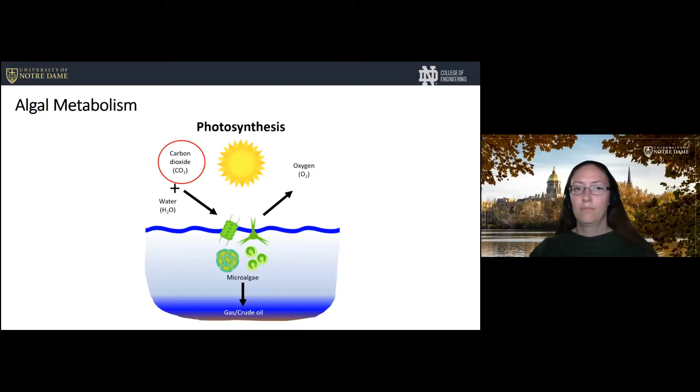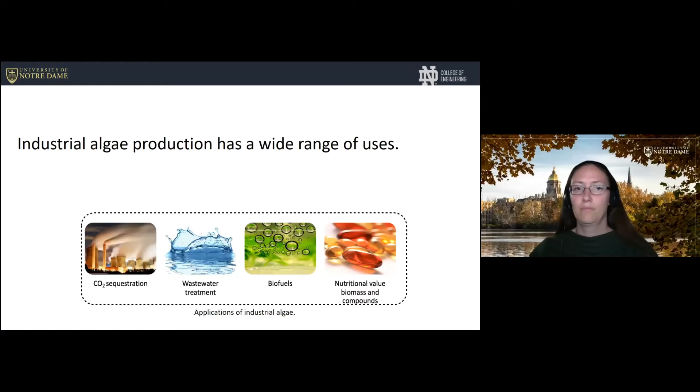So there are a number of ways that people can use algae. They can use it for carbon sequestration, wastewater treatment, biofuel production, and even producing chemicals of value, pharmaceuticals, pigments, and so on. But if you hit the next button, I'm going to focus here on the idea of using them for biofuels. So next, please.

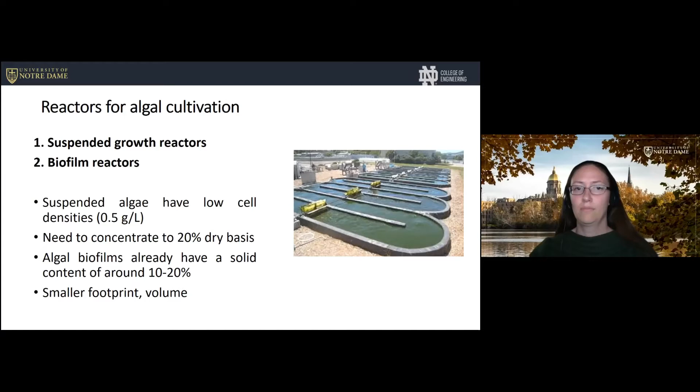So an advantage of the biofilms is that they form these dense aggregates of algae that are already at a high density, similar to the density that you'd get after the concentration of the suspended algae. So it can save a lot of energy in that respect. It also is more compact, has a smaller footprint and lower volume. So there are several advantages to using the biofilm reactors.

Next, please. As just an example of one, it's just a big rotating drum with, in this case, cords on it, and the algae grow on the cords. And they can be harvested just by scraping it off.

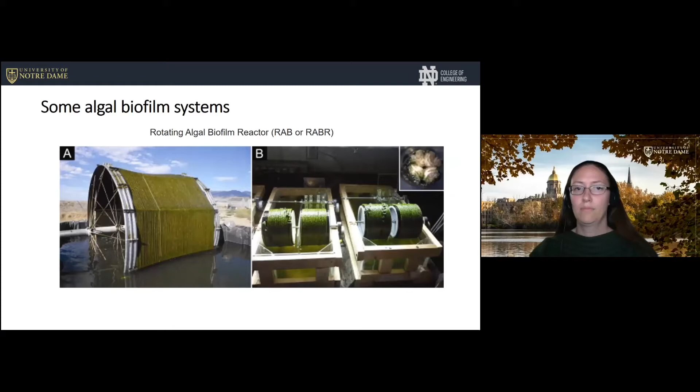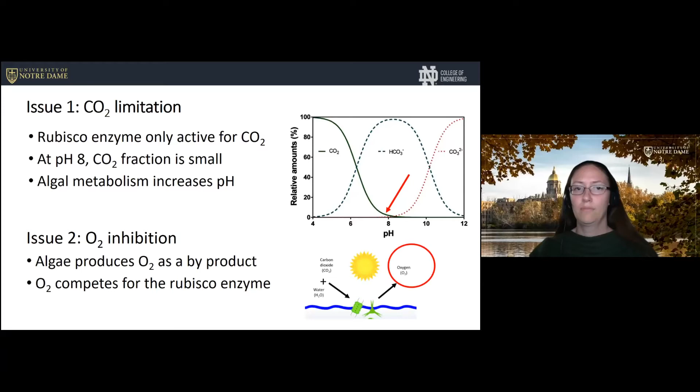Another issue is the oxygen inhibition. As you saw previously, next, the algae produce oxygen as a byproduct, and it can inhibit the CO2 sequestration because it competes with the same enzyme. So I get a next for another transition there. Competes with the Rubisco enzyme. Next again. And again, you can see that they form oxygen as they metabolize. If we have a biofilm and have all these algae next to each other, it's like having a data center with all the processors stuck next to each other producing a lot of heat. That heat accumulates and doesn't dissipate. The oxygen accumulates in the biofilm, doesn't dissipate, and can cause inhibition.

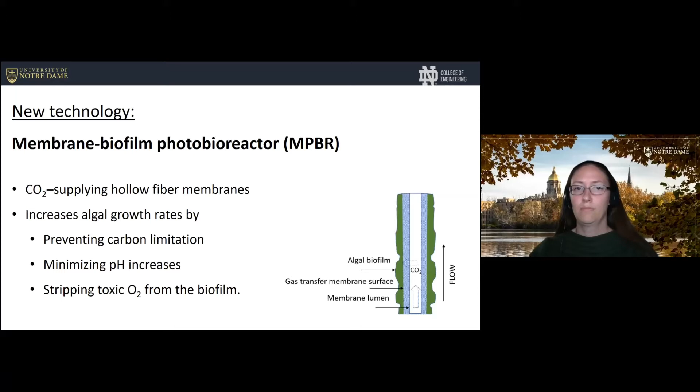Next, please. What we propose doing is using a new support for growing algae, and we call this a membrane-biofilm photobioreactor. In this case, instead of relying on CO2 diffusing from the liquid into the biofilm, we supply it through a hollow fiber membrane that we pressurize with CO2. Now, this CO2 can be taken from a stack or from a treatment plant, from some waste source, and be delivered directly into the algal biofilm. I think if you hit next, yeah, so there's our CO2.

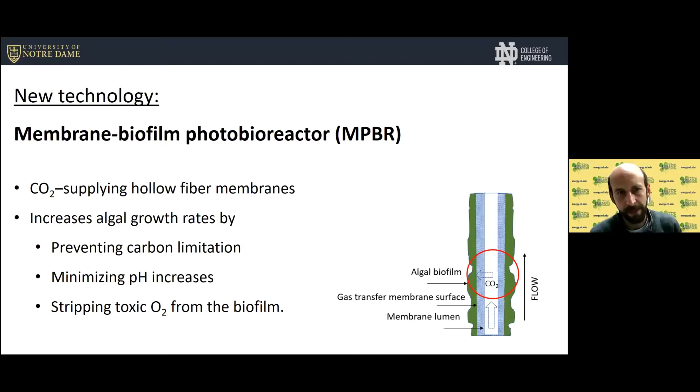And the advantage is we have much higher CO2 concentrations, allowing the algae to grow more quickly. The CO2 buffers and actually drops the pH within the biofilm, preventing this shift to higher pHs, which limits their activity. And also, in the same way that CO2 diffuses from the membrane into the biofilm, oxygen can be stripped out of the biofilm back into the membrane. So we can avoid this oxygen inhibition.

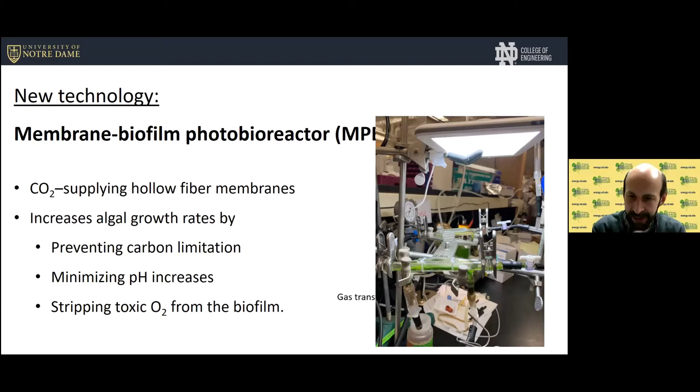Next, please. Here's a picture of this membrane biofilm photobioreactor in the lab. It's pretty small. This one's like 3 or 4 inches long. If you click again, Jen, you'll see another view of it. And you can actually see the hollow fiber membranes covered with green algae in the interior, kind of going left to right inside that flow cell.

Yeah, next again, please. So we've done some experiments and done some modeling, and our modeling shows that, in fact, we get a significant increase in the growth rates of these algal biofilms when we supply the CO2 from this membrane. So the plot on the right, and I think if you click next, there'll be an arrow that shows up there. That's what we get in the algal biofilm thickness over time when we supply the CO2, as opposed to that blue line on the bottom when we don't supply the CO2 from the membrane. Next.

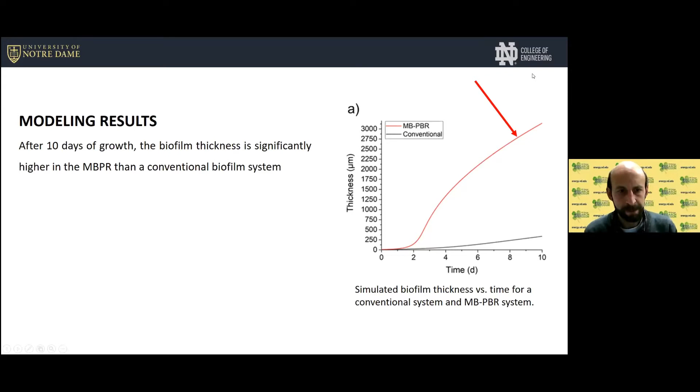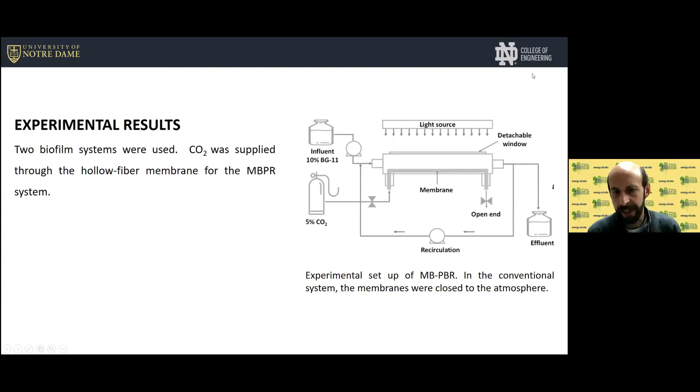And we also did experiments. Here's a picture of the reactor on the right. We have a light source on the top. We have a flow cell with the membranes, and the algae grow in this flow cell. Next, please.

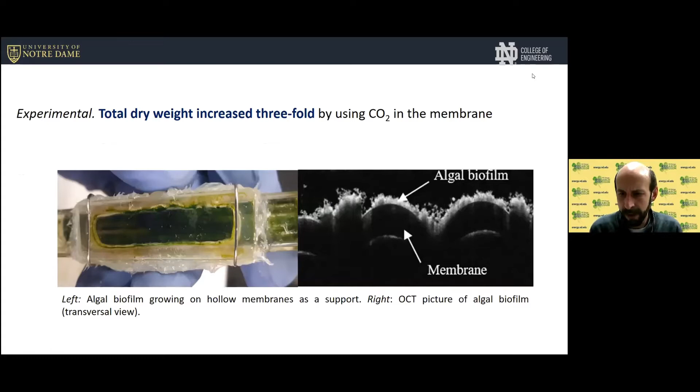And again, here's some pictures. We have the algal biofilm growing on the membranes on the left, and on the right we have an optical coherence tomography image where we can kind of get a CAT scan. We can see the membranes on the bottom and the algal biofilm growing on the top. Next, please.

So, in conclusion, we think that this membrane photobioreactor can enhance the rate of algal biomass production. And the advantages are it avoids CO2 limitation and minimizes oxygen inhibition, leading to higher growth rates. And because it supplies CO2 directly to the biofilm, as opposed to trying to bubble and transfer it into the bulk liquid, which would be very inefficient and also lead to loss of CO2, this utilizes it extremely efficiently. It's going exactly where it's needed and it's consumed in the biofilm.

One more transition. What we'd like to do next is take the next step and see, now that we have the reactor and shown that it grows more quickly, how can we use this for actually looking at biofuel production, for example, producing lipids that then can be extracted and converted into biofuels. So that's kind of the next step that's waiting to happen.

So I guess with that, I am done and happy to take any questions. Fantastic. Do we have any questions right on hand right now? Can I ask one?

Absolutely. Wondered, do you know anything about the photo efficiency, Rob? What fraction of photons coming in are actually getting used? So, that's a good question. No, we haven't evaluated that. I'm trying to think if it would be different from a regular algal process. I suppose it depends a little bit on how it's operated, but I don't see why it would be different from any other algal process in that respect.

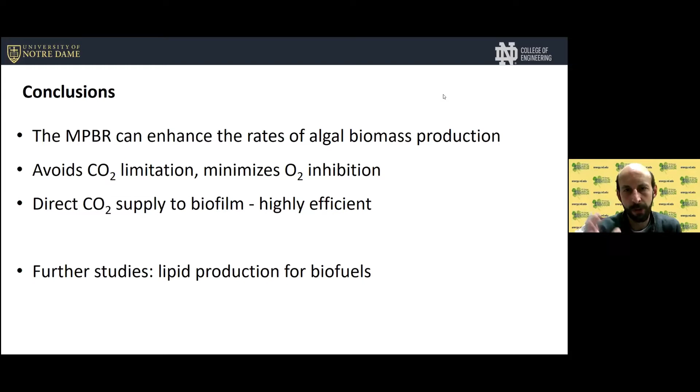Yeah, that's a really interesting question. I think that leads to an important question, which is how do you harvest the biofilm when it's ready? And the answer is, I guess we don't know exactly. One thing that I've seen done in conventional biofilm processes grown in tubes, tubular photoreactors, is they pass, I think they call it a pig, like a block through it, and that scrapes the biomass off the walls.

I don't know if you were to grow it vertically, if the weight and the strength of the biofilm would be such that it would really fall off when it reached the right thickness. Actually, with our modeling, we've been trying to estimate the optimal thickness at which we'd like to harvest it. Because if you harvest it when it's very thin, then you're harvesting frequently. If you wait till it's too thick, then the interior portion probably isn't active because the light doesn't penetrate far enough. So there's some kind of optimal thickness where you'd like to harvest.

There's also probably a residual thickness that you'd like to leave, because you need algal biofilm to produce more algal biofilm. So these are all good questions, and I don't have a good answer, but I think they're very interesting and important ones that we'll need to look into eventually.

I had a question. Sure. You mentioned that you were looking down the road at using these maybe with effluent from traditional combustion, right, or CO2. How robust are the membranes in the algae to the other byproducts that you would get off of that combustion, like carbon monoxide, NOx, SOx, those types of things?

Those are all good questions. So yes, I don't know for sure that we could use the combustion right off of the stack without any prior treatment. There's also biogases produced at anaerobic digesters and wastewater treatment plants that also have sulfide or siloxanes or other things that could be detrimental. We haven't gotten that far yet, but I think pretreatment would be needed, but we don't know for sure at this point.

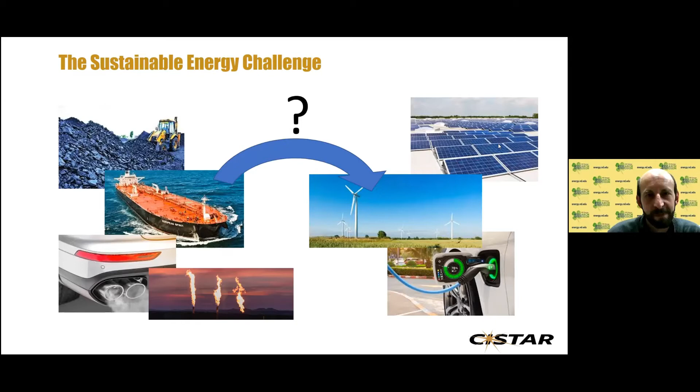Things like hydro and nuclear and others are important, but the energy need is so great that we're not going to satisfy it all immediately. And again, then the challenge is how to continue to provide ourselves power, but do it in a more environmentally friendly and sustainable way.

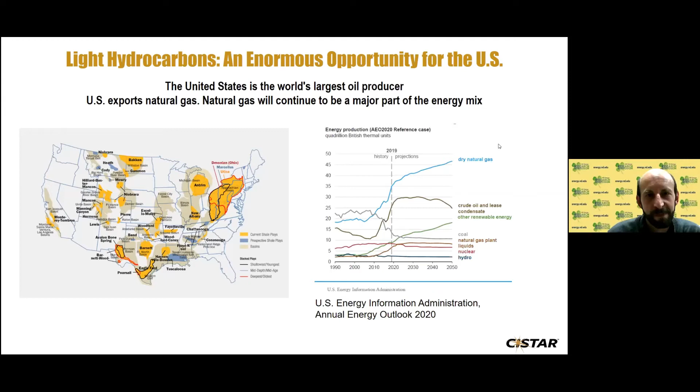So over the last 15 years or so, the United States has been presented with a new opportunity. There have been technologies that have allowed us to access hydrocarbons that aren't available in other parts of the world, but are available right here in the United States in the form of shale gas. And I know you've maybe heard a lot about fracking and shale and so forth, and certainly extracting energy from the earth always has to be done in an environmentally responsible way. But I think it's safe to say that we're not going to stop doing that altogether anytime immediately.

So the point of CISTAR is to take advantage of these newly found shale resources and use them in a way that helps us manage this transition to the new energy future. So you could go to the next one, Jen.

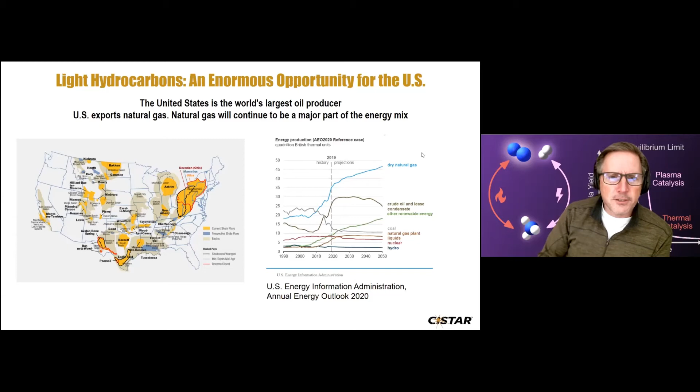So what is the challenge with shale gas, short of getting the gas out of the ground? Well, the real scientific challenge, and the one we're trying to address, is that the types of feedstocks that you get out of shale are very different from coal or petroleum or what have you. Shale gas contains a lot of small molecules. People remember from their organic chemistry from long ago, there's a picture of a methane molecule, an ethane molecule, a propane molecule. These are small, they're gaseous at ambient conditions.

They're not a solid like coal or a liquid like petroleum. Unlike oil fields, which might be in one location and drawn on for a long period of time, the sources of shale gas are remote, as I just showed you. They're scattered all over the United States, even here, even in Indiana, and so that raises a challenge in how to take advantage of something that's distributed so far and wide.

That's in large part why you'll see things like flaring happening, which is a real waste of energy. In some of these places where hydrocarbons are being taken out of the ground, some of these small molecules are being released, and there's nothing to do with them other than to set them on fire. And so that's a serious waste. And why is that so? It's because these are intrinsically unreactive. So they're gaseous, they're hard to move anywhere, and they're unreactive, so they're hard to do anything with.

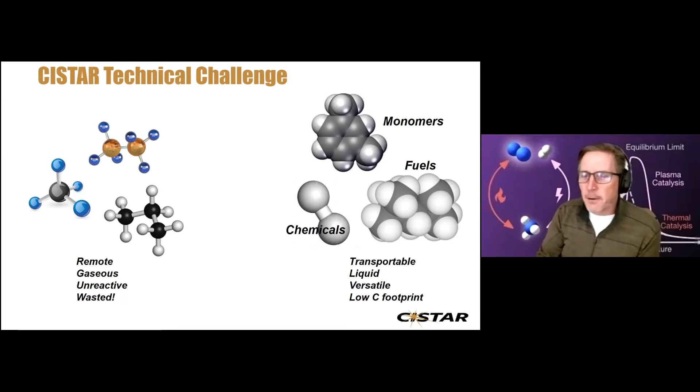And the advantages of those things on the right is those are condensable materials. That means they're easily transportable. They're much more versatile from a chemical perspective than the things on the left. And if we manage this process in the right way, we get to those useful endpoints in a more sustainable, lower carbon footprint way than we do, say, with getting petroleum from the Middle East. Could you click next?

So the vision of CISTAR is to develop the processes that are necessary to take what's widely available and often wasted and transform it into things that can be used in a much more useful way, and to do that in a sustainable way and in a way that has a net carbon footprint lower than what we do today. Oops, can you go back for a second?

I didn't put in a technical slide as to what actually makes it hard to go from the left to the right. It looks like I'm just moving carbon atoms around. How hard can that be? Well, it turns out it can be pretty challenging to actually do the types of selective reactions that need to happen. So a big part of CISTAR is chemical transformations.

A big part of CISTAR is separations, process optimization, and then it's environmental evaluation to give us feedback on which of our processes are really going to be effective and both economical and environmentally responsible. So those are big challenges. They're not the sorts of things I'm going to solve myself or any one individual is going to solve themselves. So now if you could go to the next.

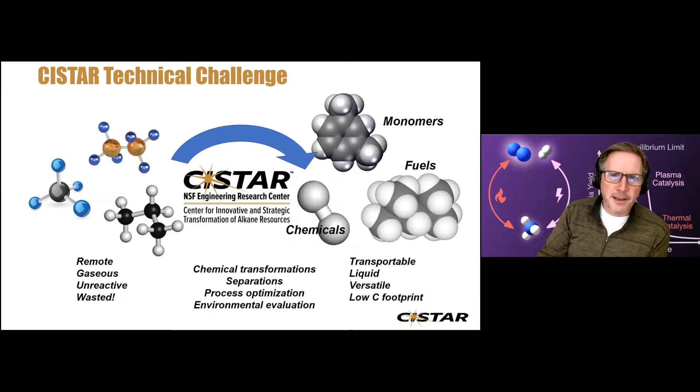So CISTAR is a National Science Foundation Engineering Research Center. So this is the biggest type of activity that the National Science Foundation funds. It's a multi-institutional team. It's led from Purdue, but with a very large contribution from Notre Dame and our other partners at New Mexico, Northwestern, UT Austin.

There's probably about 25 to 30 PIs, and in total 200 team members if you count all the students that are working in it and other support and other things that the center does. So it's quite a large concerted effort to try to figure out how to go from the left to the right in a responsible way, left to the right on the previous slide. Can you go to the next slide, which I think might be the last?

So, part of CISTAR is to do research to enable these transformations, but it's a National Science Foundation funded center, and we recognize that to get to a productive future means more than just doing research in the laboratory. There's a large innovation component where we think about how we take what we learn in the laboratory and translate it into practice. So we have industry participants that help us with this.

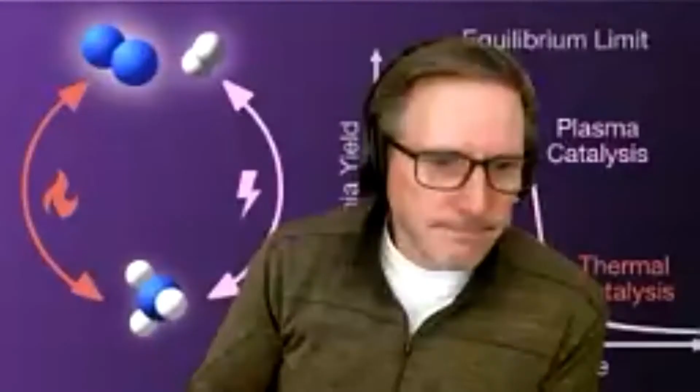All right, so in the interest of time, we're going to move on to the final presentation. Next we have Professor Zhang in the Department of Aerospace and Mechanical Engineering, who will be speaking today about thermoelectric devices for harvesting waste heat. And you can go ahead and unmute yourself. Okay, yeah. Thank you, Jen. Hello, everyone. Today it's my pleasure to talk about our work in harvesting waste heat.

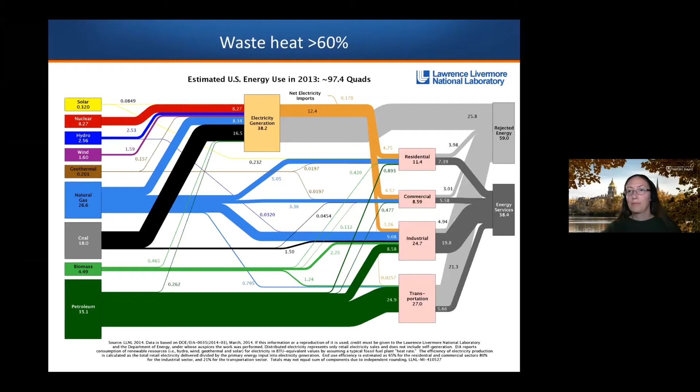So here I want to first cover, okay, sorry. One slide shows you the waste heat actually is a big deal, as Paul mentioned in the very beginning. Overall, we are wasting over 60% of the global energy consumption into waste heat. And therefore, if we can harvest even a small portion of that, it can make a huge impact.

So here, our lab is trying to harvest the waste heat using this TE device. Basically, it's a solid state device that can convert heat into power. And I'm showing you, we can basically harvest the waste heat from almost every resource, such as the waste heat in the car, in the power plant, in the factory, in the airplane, and solar thermal heat.

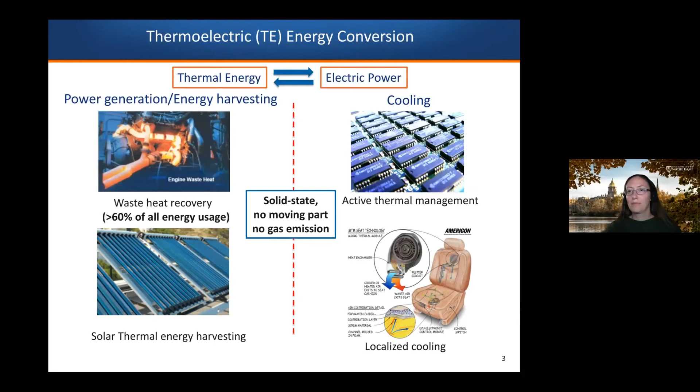We can also even use our device for cooling. Basically, here we need to use the power, then we can cool these devices. So here's just some principle showing you that we're using this very simple device, physics converting delta T into Seebeck voltage. And we need to basically get the material with very high ZT value in order to convert more heat into power, getting higher efficiency.

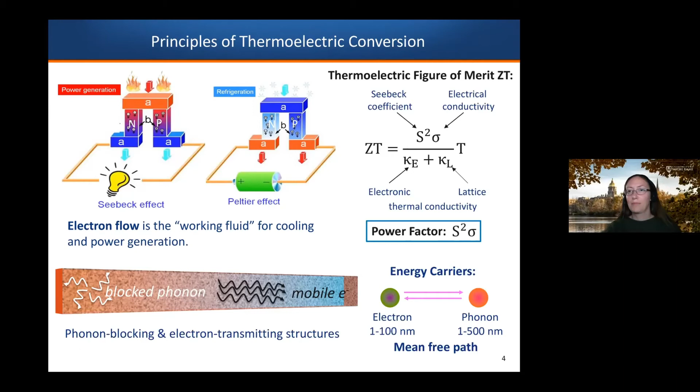So here basically we need to design the material in a way to block the heat transport, whereas allow the electrons to flow freely. Because these electron and phonon, they have very small mean-free paths, and therefore our approach is to design the material at the nanoscale in order to control the electron and phonon transport to get the highest performance at the materials level. And here's our approach from bottom up. We can design material to give us the highest ZT, converting more heat into power.

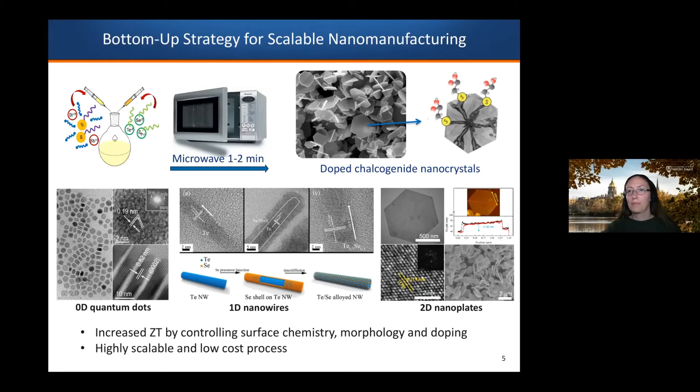So meanwhile, we also need to develop approach to transform this nanoscale material into the macro scale system to make them useful at a low cost. So here our approach is to use a very scalable, low cost printing process. We can then assemble and convert this nanoscale building block into low cost, high performance system to convert the waste heat into useful power.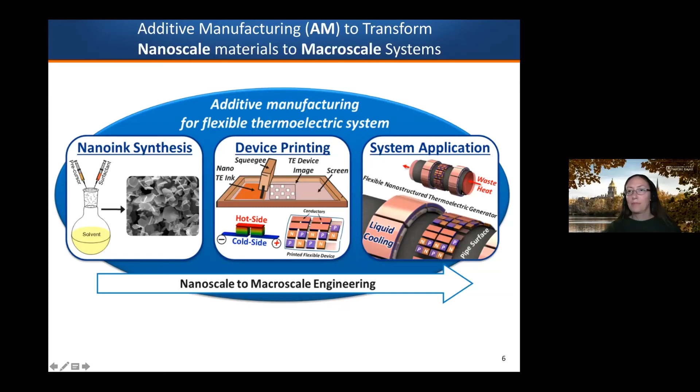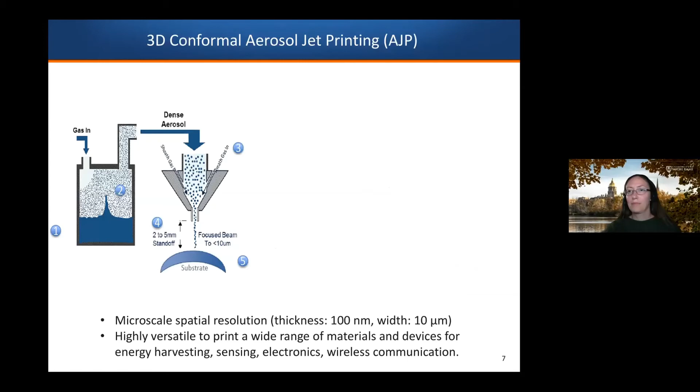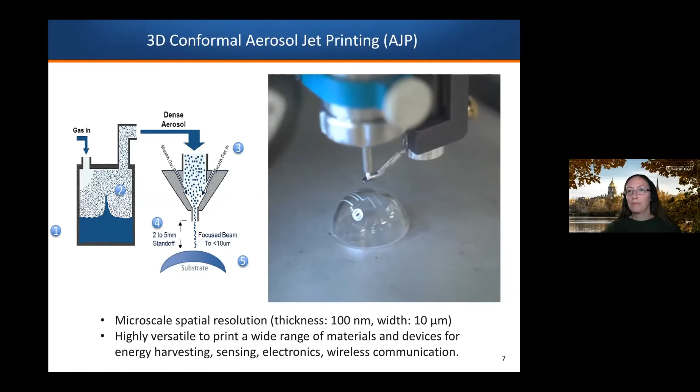So we have many different printing methods we have developed in the past. One of the printing methods we're using is this aerosol jet printing. We can basically print the device on any substrate, either 2D flat or 3D curved substrate. So after printing, we also have a very fast and efficient technique to sinter the printed particle into a highly dense and high performance flexible device. So here we use this pulsed light to sinter the printed particle on virtually any substrate, like this flexible substrate polyimide papers, which can enable us to develop highly flexible device.

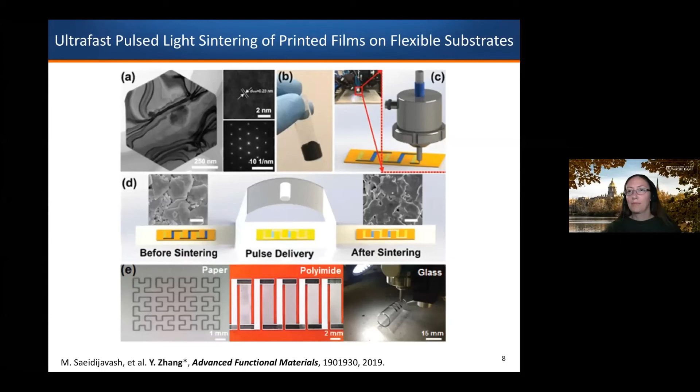Besides developing this small-scale device for powering sensors, we're also working on some much bigger scale device in harvesting the waste heat from the cars, from power plants, and so on. This is one previous DOE project we worked on. The goal is to recover this automotive waste heat from the exhaust, because you all know the car is wasting over 60% of the fuel energy into the waste heat. So our goal is to improve the fuel economy in the car and also reduce the CO2 emission.

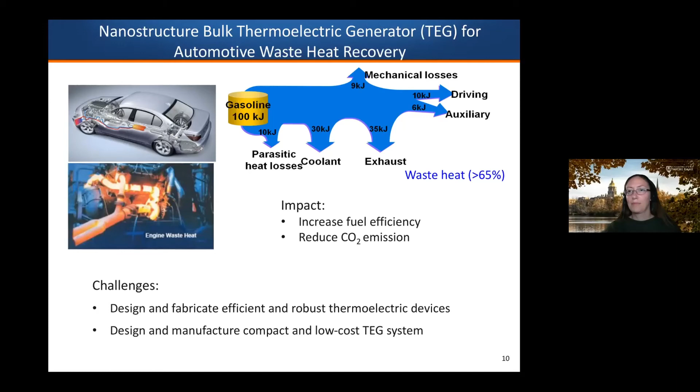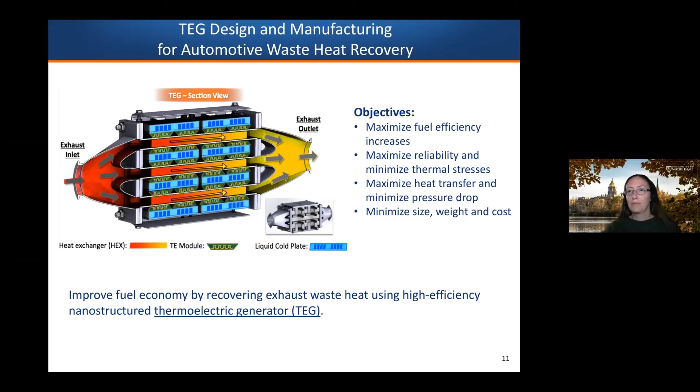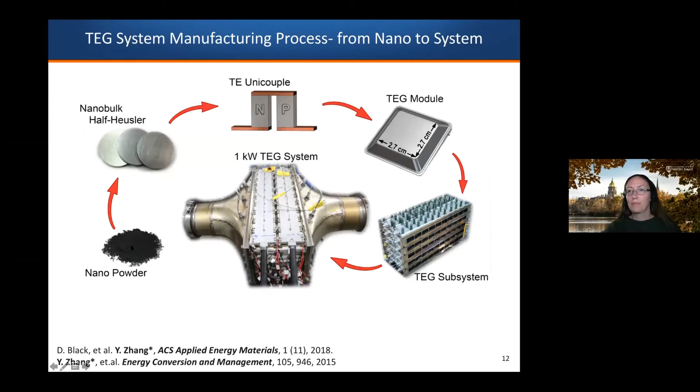So this is kind of our device layout. We designed this very compact and efficient system to convert the exhaust waste heat in the engine, and we can basically make a very compact, efficient, low-cost system that can be used in harvesting this waste heat. This is our overall process in making this larger scale TEG from the nanoscale particles. So to show you the real impact we can achieve using this nano material or nano technology.

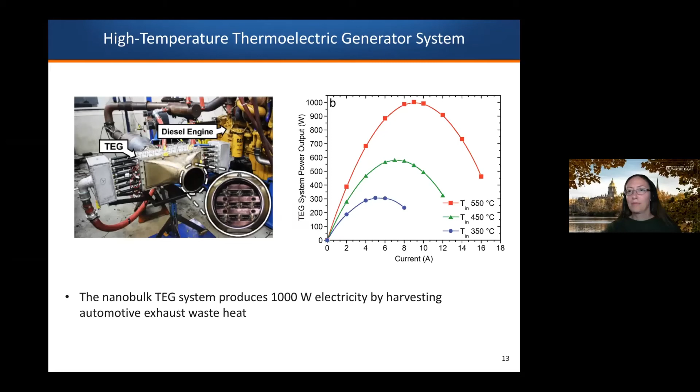And this is a real testing we did using a diesel engine from car, and then we can show you we produced over 1,000 watts of power just by recovering the waste heat in this car engine. And there are still lots of things we can do to harvest waste heat from other places. So overall, we believe that this nanomaterial, nanoscience can play a big impact by using their high performance and also using low-cost process in making them into useful devices.

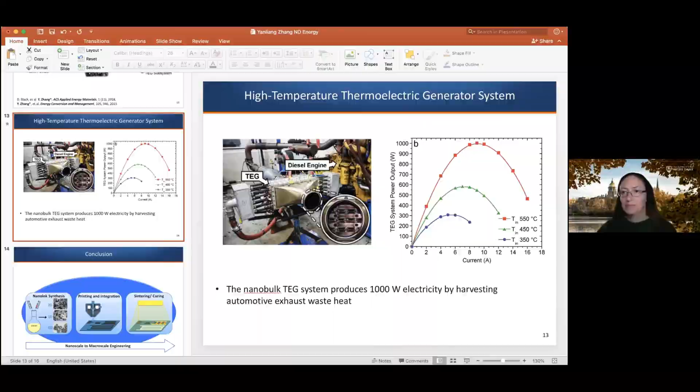Yeah. So Yanliang, you had also used it in the exhaust, right? That's what you were showing? Yeah, the car here, we're using the car exhaust. We also have a project ongoing. We put this TEG in the nuclear reactor core. We want to produce the power at the core of the nuclear reactor to power the sensors and enable self-powered sensors. That's one ongoing effort we're working on. Our TEG survived even in the core of the nuclear reactor.

Yeah. So I think what Bill was talking about was if you put it in an environment where you are right next to the automobile engine, that's a different problem than where you have a heat source which is consistent, not dynamically variable. Yes. Then this application becomes pretty interesting. And also, like Paul is saying, you could have multiple of these small devices and recover heat over larger areas.

So those kinds of applications become a lot more, I would say, attractive when it comes to using thermoelectrics for heat recovery. Especially if your 3D printing type approach can produce multiple devices, so arrays of devices, and use that as a heat recovery system for large surface areas. Yes. I think we might have had one more question.